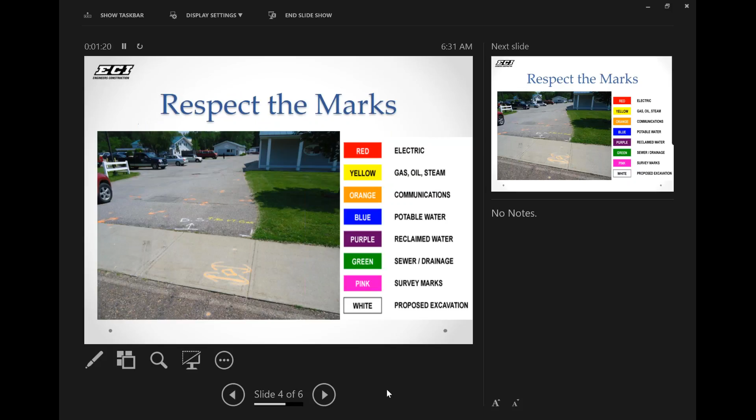So working around underground utilities, we're going to talk in a two-part series. This one is just that quick awareness piece. We've had some really close encounters in the last couple of weeks regarding underground utilities. A lot of it's been abandoned stuff, and that's what we're going to talk about next week - what to do with abandoned utilities.

I just want to quickly go over some things that are really important on the preventative side of utility marks - really respect the marks once they're down. Do a really good walkthrough, take pictures, take a video with your smartphone, anything to be able to identify what we're about to be working in and around when it comes to underground utilities.

I just wanted to quickly do a review again. Everybody should know this well, but the color coding system - I can't stress it enough - that color coding system is very pertinent to what we do. The biggest ones are that red and yellow. Those are the really dangerous ones we're working around - electric and gas.

The communication line isn't going to hurt us, but it's something that could be a high dollar amount when it comes to claims. Red is electric, yellow is gas, orange is communication, blue is water. We won't see purple unless we're working on Global Foundries. Green is sewer or storm drainage. And we really want to use pink for our survey marks, so we don't get confused about any underground location.

So respect the marks out there. Some of the things we really want to do is a good risk assessment before we get out there and start removing asphalt, taking out topsoil, or pulling stakes out. What do we have, and then how are we going to verify that this is what we're working with?

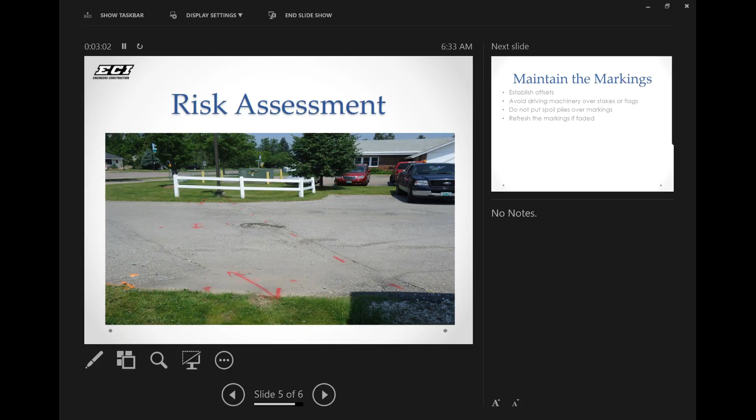Some quick ways to maintain it: create offsets, use grade stakes, use your field books, take ties off of trees or permanent fixtures so you can always go back and say, hey, this is where that dash mark was for the gas line or the power line. Those are the real heavy hitters - we want to make sure we get good offsets if we take our marks off or reclaim the road and need to go back, because it takes 48 hours potentially for an on-target locator to come back out and put markings down.

Myself, Matt Saganos, Brandon Stringer, Carter Wright - we can get out there and try to do some more locating for you. But ideally, we're supposed to call in and remark.

So avoid driving machinery over grade stakes. Those spoil piles - let's get those away from our markings. When we bury those and forget where stuff is, there's a high probability of us potentially reaching that 18-inch tolerance zone, something we'll talk about down the road.

Just have spare paint in your job trailer. If you see a faded mark, or have a laborer or someone who doesn't have anything better to do, refresh those marks, especially on road jobs we're doing down in Randolph, or road work here in Williston. There's a lot of potential for underground utilities there. Keep refreshing those marks so they stand out, and really talk about these underground utilities in your risk assessments on a day-to-day basis, so we can hopefully eliminate any utility strikes moving forward.

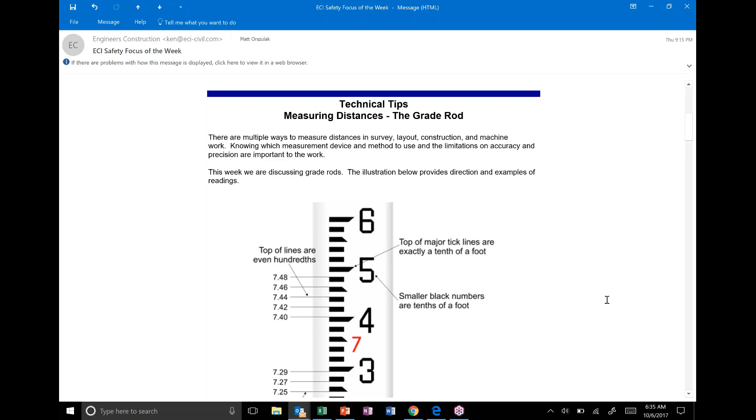So technical tips, we're talking about measurements, and grade rod is today's topic. Just a summary of how to read a grade rod and what it looks like. This illustration from one of the grade rod suppliers shows it pretty well.

Basically, you start at the red number, 7. If you're at this point, we'll start at that, 7, because that's the major foot mark. And then you go 1, 2, and then I always go to the middle tick, which is 5. I either step up when I look at it or step down. In this case, if you're right at that center tick, you're at 725.

If you go down 1 tick, and each the black and the white space are equal distances of 1/100th of a foot, you go down 1, and you're at 724, 723, 722, 721, and at the number, you're at 720. It's really quite an ingenious way of getting quick measurements. Without those ticks, you'd be trying to eyeball and count up or down, and it wouldn't work very well. These tick marks are really a great way to identify your elevation.

Remember, you'd be looking at this through probably an automatic level, or setting your grade rod with your signal receiver for the laser. And you would sometimes be looking at a long distance away if you're looking through a scope. So it makes it easier to get a quick reading from a far distance.

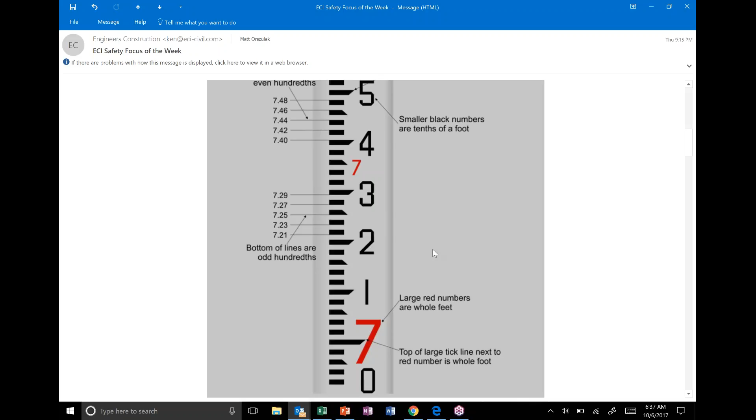So 7.25 is 7 foot 3 inches. Right, we're in 100ths of a foot. So usually when you have an elevation reading, you would be in 100ths of a foot. Sometimes architectural drawings might have inches, so you got to be cautious.

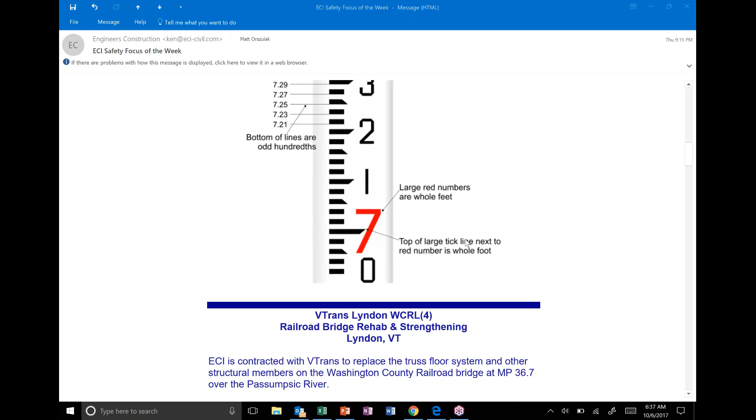So this week we're profiling the Lyndonville WCRL 4. That's the VTrans designation for contract number, and it is because in Lyndon it's related to the railroad. They have some acronyms to shorten the name for the Washington County Railroad. But anyway, this is a bridge rehab and strengthening project we are doing and finishing up in Lyndonville.

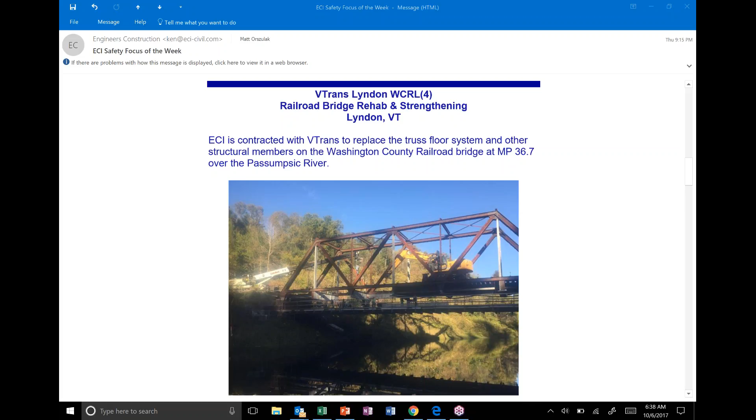And like I said, it's a VTrans job. The purpose of the project was to replace the floor system and other structural members on this railroad bridge at milepost 36.7 in Lyndonville over the Passumpsic River underneath us.

So it's a little hard maybe to see here, but we've got the 450 crane extending out inside of the bridge with the 210 John Deere high rail excavator without a bucket on it, handling the materials as well as the crane.

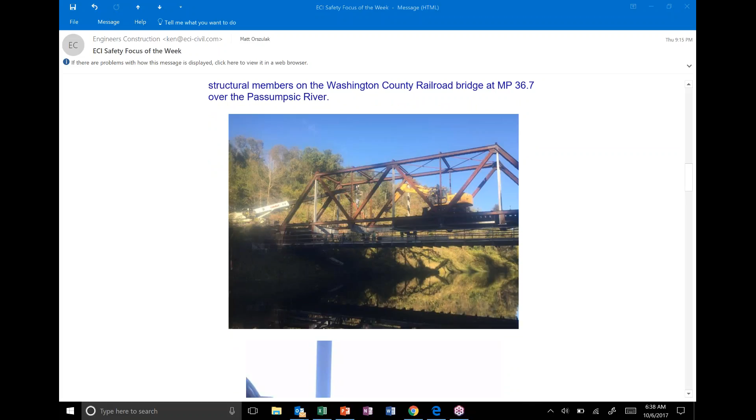A little bit of torch work. I suspect that's probably for the removal of rivets or other plates and clips, basically, to hold the existing end that we're replacing. That would appear to be a floor beam. Remember, floor beams are the ones that cross from the truss over, so it's the main load-carrying pieces of the floor that takes the load over to the big truss sides there.

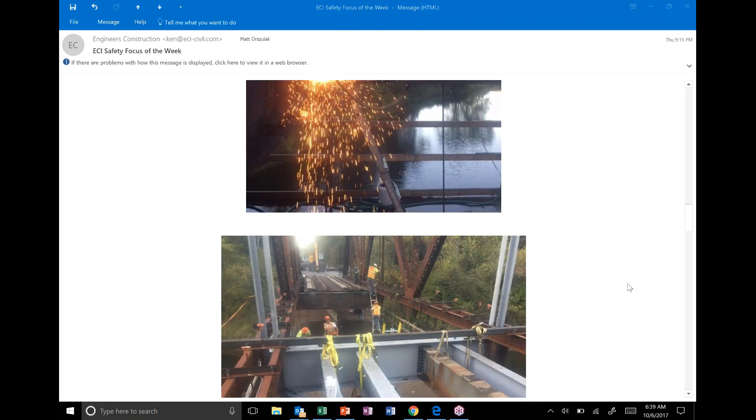There we go, we can see it from a different perspective. Here's a replaced floor beam. These are stringers underneath the tracks, and then the floor beams take the load from the stringers and bring it out to the trusses. So they're also, as you notice, tied at these points either at a hanger or at a panel joint for the truss.

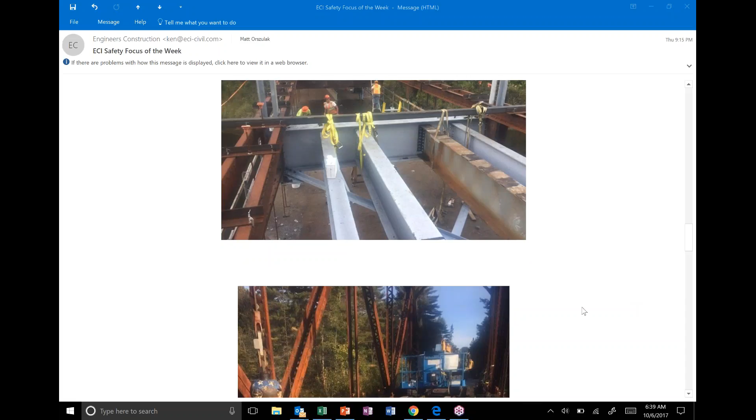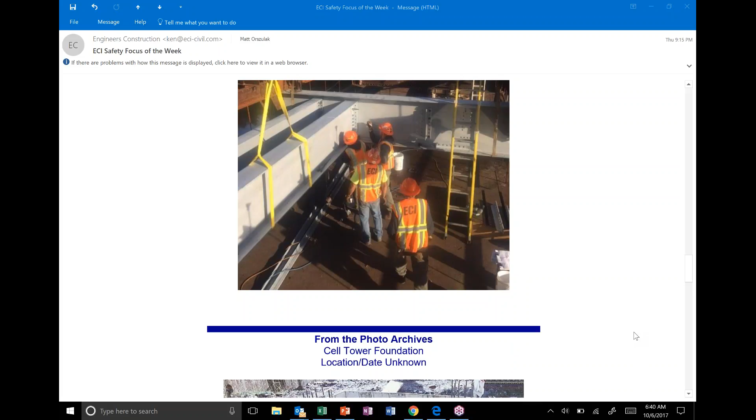These are galvanized, built-up steel members. And we had a shutdown, so we had the weekend starting Friday to take out track and replace these pieces. Pretty impressive that in a short period we can dissect a bridge, pull apart these structural members, and install new ones, and rebuild and put the track back together for the service to resume on the road over after the weekend.

Then for the photo archives, I have a picture of John Zeno and Scott Tomlinson. That's in Berlin — I was gonna say I thought it was Berlin, but I didn't dare put it on there. So John is on his knee doing the rebar, and Scott, I didn't notice that as Scott, but Scott was like a project engineer here for a while, mostly in college, and now he works for Simpson, Gumpertz, and Heger, who we're using as a consultant.

They're out of Boston, and they were the consultant for like the Pittsford Bridge work we did, where we did some redesign on the cap, and then also for the culvert projects we're doing in New Haven and Ferrisburg. They're doing the final design work on the precast. So Scott's not actually involved in the work, I don't think, but that's the company he went to. That's what I got. Have a good day out there.